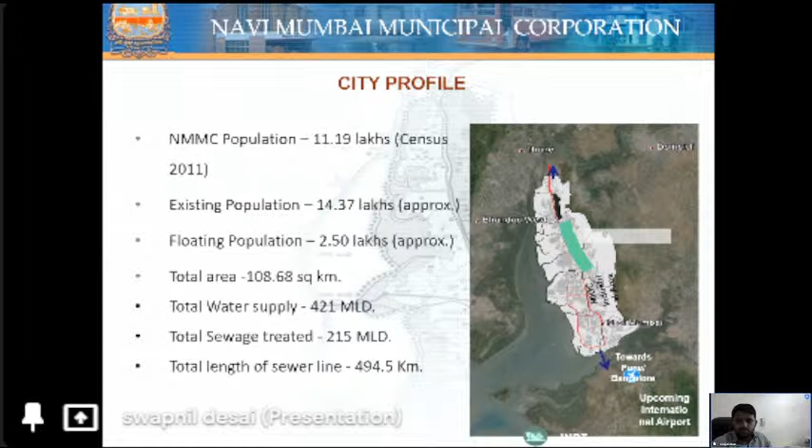So before the initiative, NMMC had 7 conventional sewage treatment plants, generally based on a lagoon system. Most of the treatment units were in deteriorated condition, resulting in partial treatment of the sewage. And because of variation in the flow, like in summer and monsoon season, the existing sewage treatment plants could not cope with the variation in the flow.

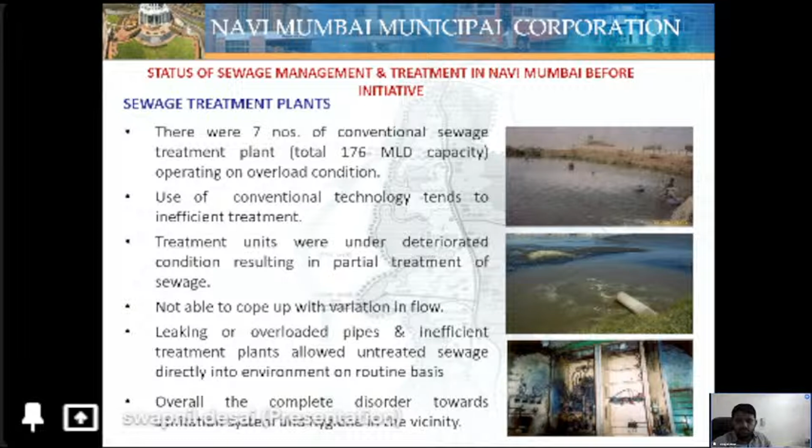So, this led to leaking or overloading of the pipes, or inefficient treatment plants allowed untreated sewage directly into the environment on a routine basis. So, overall, there was complete disorder in the sanitary system and hygiene in the vicinity. So, considering that, NMMC adopted a strategy for sewage treatment, which evaluated the existing sewage network, that is the collection and conveyance system, and the treatment facility within the city.

Also, we identified the sewage treatment facilities and sewers required to handle the raw sewage generated within the city. We were also aware of the different sewage treatment technologies available in the market today, like sequential batch reactor technology, MBBR, and MBR. There are also ultrafiltration, reverse osmosis, and nanofiltration technologies available. So we expanded and enhanced the existing sewage collection, conveyance and treatment facilities, which will cater to the growing population of Navi Mumbai.

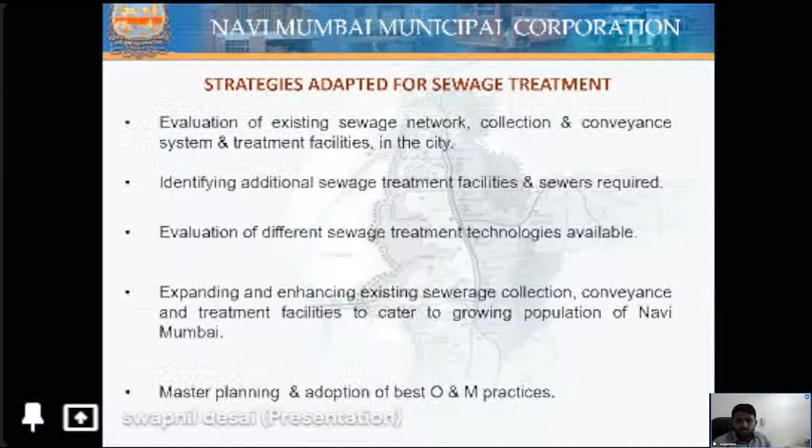We have done the master plan and adoption of the best practices for the operation and maintenance also. Also, our treatment facility is based on conventional technology, which is basically an aerated lagoon system and oxidation ditch system, which do not generate treated water as per the norms laid down by the State Pollution Control Board.

So NMMC has decided to go for some advanced treatment technologies in the field of wastewater treatment. These advanced treatment technologies are basically the modification of traditional treatment by making changes in the process, or by introducing automation. So this technology is named the C-Tech technology, that is sequential batch reactor technology.

This C-Tech based advanced sequential batch technology is nothing but an activated sludge treatment plant where the sewage is treated in batches instead of a continuous process. Its operation is mostly controlled by programmable logic controller panels, and the footprint area of the STP is less than that of the conventional technology.

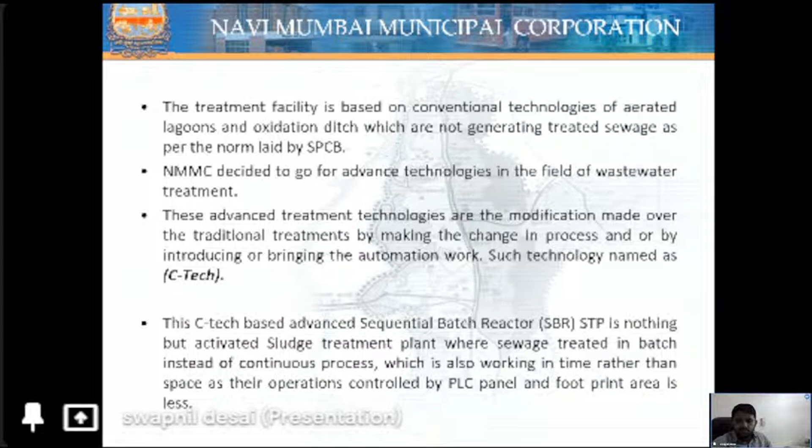So our aim is to adopt modern technology in the area of sewage management, recycle and reuse of wastewater to every possible extent, like for garden purposes, washing of cars, and other non-potable purposes. We provide a 100% sewage network and sewage treatment facility within the city and make it a sustainable sewage system.

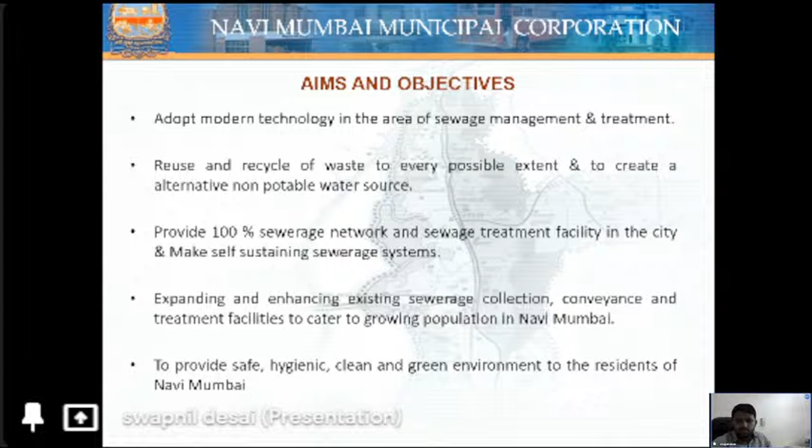We expand and enhance the existing sewage collection system, conveyance and treatment facility that will cater to the population of Navi Mumbai. Also, we provide a safe, hygienic, clean and green environment to the residents of Navi Mumbai. So these are the basic infrastructure of sewage management within the city.

NMMC has 6 sewage treatment plants: 100 MLD capacity at Nerul and Vashi, 80 MLD capacity at Airoli, 87.5 MLD capacity at Kopar Khairane, 37.5 MLD capacity at Sanpada, and 19 MLD capacity at Belapur. Also, there is a 30 MLD sewage treatment plant constructed by CIDCO and handed over to NMMC in 2017. So we have a total of 7 sewage treatment plants with a total capacity of 450 MLD.

We also have 21 sewage pumping stations that receive the raw sewage generated within the city and transfer it to these 7 existing sewage treatment plants. The total sewage pumping capacity is around 212 million liters per day, and the total length of the sewer line is around 494 kilometers. At present, around 215 MLD of raw sewage is treated at our 7 sewage treatment plants. So these are the details of the sewage pumping stations.

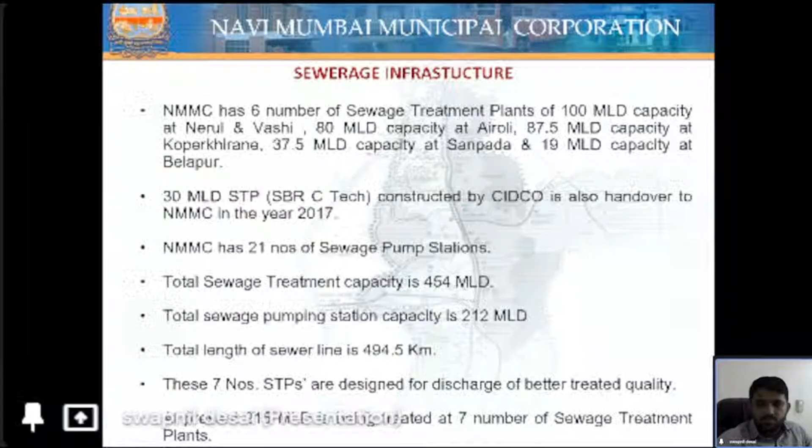Basically, our old plants were based on conventional technology with around 176 MLD capacity, and we upgraded these plants based on modern technology, known as SBR, sequential batch reactor technology. So we upgraded the treatment capacity from 176 MLD to 454 MLD. Also, the area requirement for these modern technology-based STPs is around 50% less than that of the conventional technology.

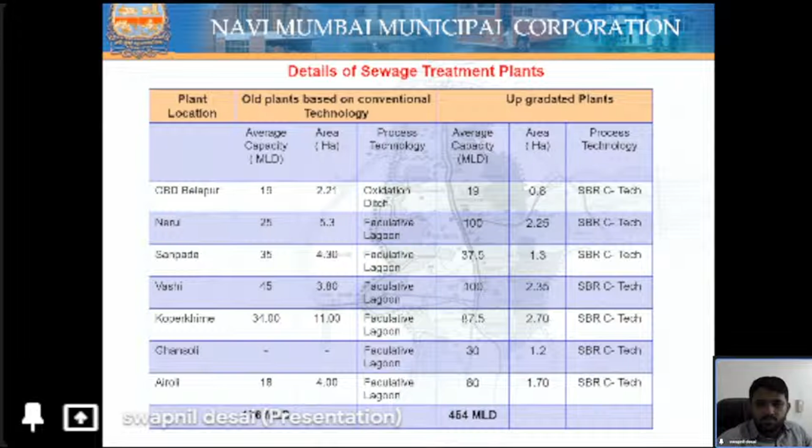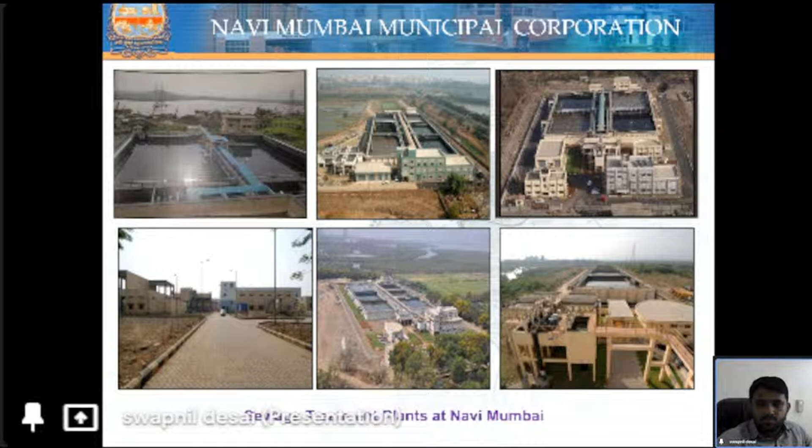So these are our sewage treatment plants, located at different locations in Navi Mumbai: one at Belapur, one at Nerul, one at Kopar Khairane, one at Airoli, one at Sanpada, and one at Vashi. This is a typical process diagram for the sequential batch reactor technology.

Firstly, raw sewage from the pumping stations is collected at the sewage treatment plant, where there is a raw collection tank known as the pump house. The function of this pump house is to lift the raw sewage to the primary treatment. In the primary treatment, we have installed different types of screens: a mechanical bar screen that removes floating particles up to 20 mm, and a fine screen that removes floating particles up to 6 mm.

Then this raw sewage is transferred to the grit chamber, where grit particles like sand are removed. Then the primary treated sewage is transferred to the sequential batch reactor basins. For each plant we have around 4 to 6 basins where different processes are carried out. We will see the different processes one by one.

After the sequential batch reactor basin, the semi-treated sewage goes to the chlorination system, where we have a chlorine system to disinfect various bacteria and viruses. And finally, the treated water is collected at the collection tank.

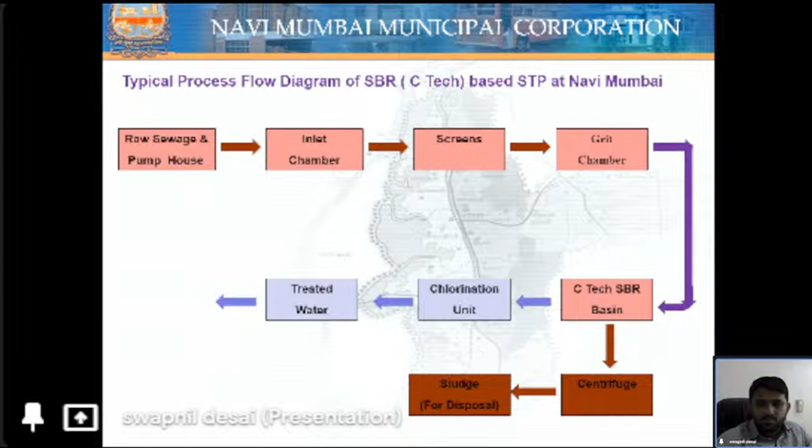Also, in a sequential batch reactor basin, there is sludge generated within that basin. We can lift this from the basin with the help of different pumps, that is the return activated sludge pump and surplus activated sludge pump, and transfer it to the centrifuge machines. This centrifuge machine basically removes the water content of that sludge, and this sludge acts as a manure for gardening purposes. We use this sludge for our horticulture purpose.

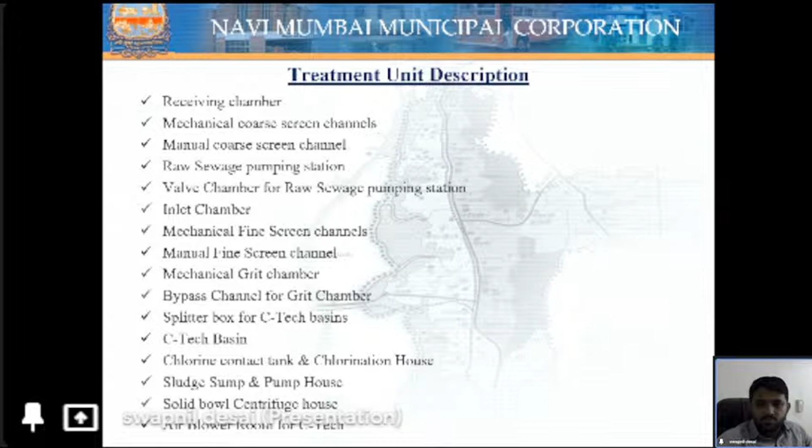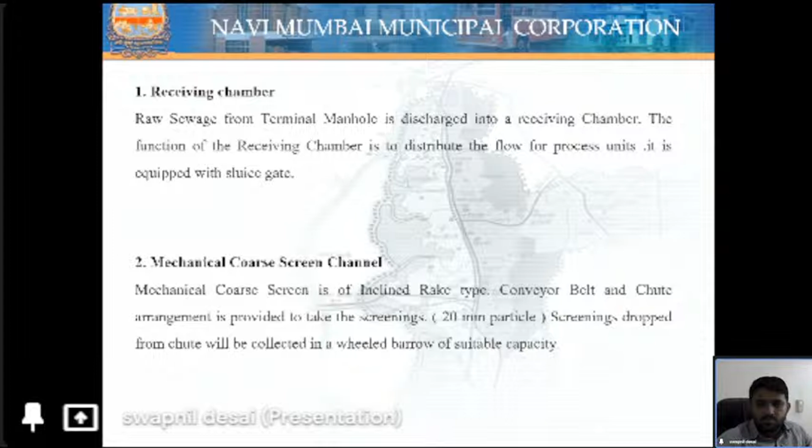So we can see one by one the different units in sewage treatment plants. First is the receiving chamber, as we discussed. Raw sewage from different terminal manholes is discharged into this receiving chamber. The basic function of this receiving chamber is to distribute the flow for the process unit. Again, there is a mechanical coarse screen that can remove the floating material up to 20 mm particles. Again, there is a manual screen.

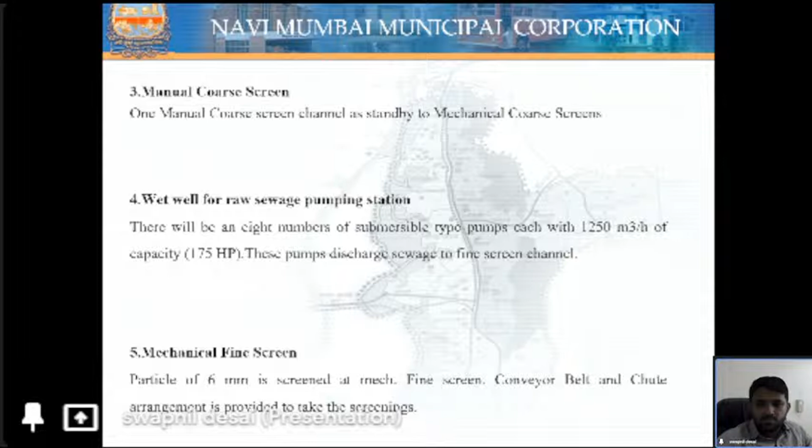Then after screening, raw sewage goes into the wet well for the pumping station. We have 8 pumps having a capacity of 175 HP. These pumps discharge the sewage to the fine screen for removing the 6 mm particles. This is basically a mechanical fine screen which is used to remove particles up to 6 mm.

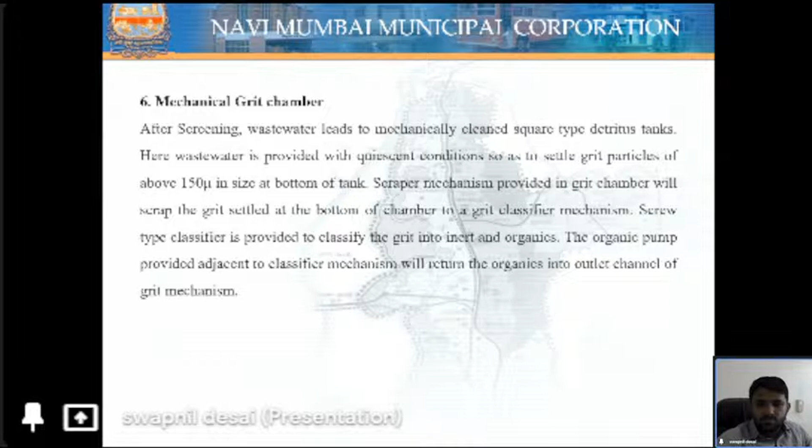Then the mechanical grit chamber. After screening, this wastewater is mechanically cleaned. This is basically a detritus tank where the wastewater is provided with quiescent conditions so as to settle the grit particles above 150 micrometers. And this scraper mechanism is used to remove the grit, and it generally contains inerts and organics. We also have organic pumps, which are provided adjacent to the classifier. This is basically the grit chamber mechanism.

So again, as we discussed, primary treatment includes screening of 20 mm particles, then 6 mm particles, and also removing the grit. This is basically primary treatment. With any kind of technology you adopt, there is a primary treatment that can remove the floating materials and the grit particles.

Then there are basins with a biological process where we have four cycles within that basin: first is filling, second is aeration, third is settling, and the last one is decanting. So it has a 3-hour cycle. We can see what happens in that basin.

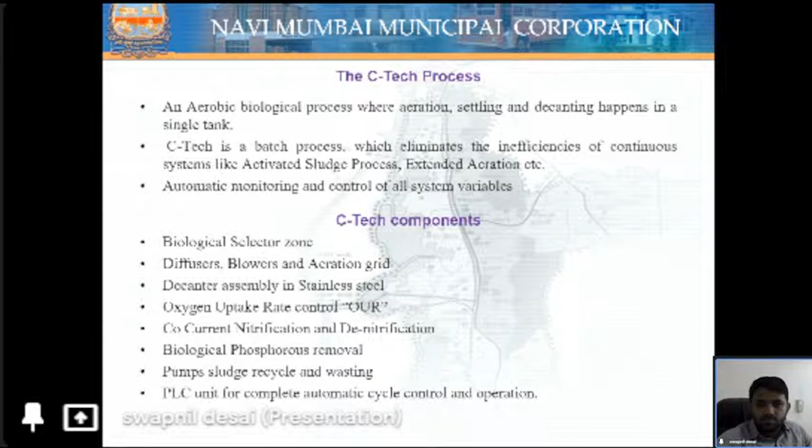So the C-Tech component has a biological selector zone and diffusers which provide the oxygen for bacteria within that reactor. To provide the oxygen, we have an air compressor within the system. Also, the decanter assembly in stainless steel handles the treated water, and it is transferred from the C-Tech basin to the chlorination system for disinfection of bacteria and viruses. So this is typically what the actual SBR C-Tech is.

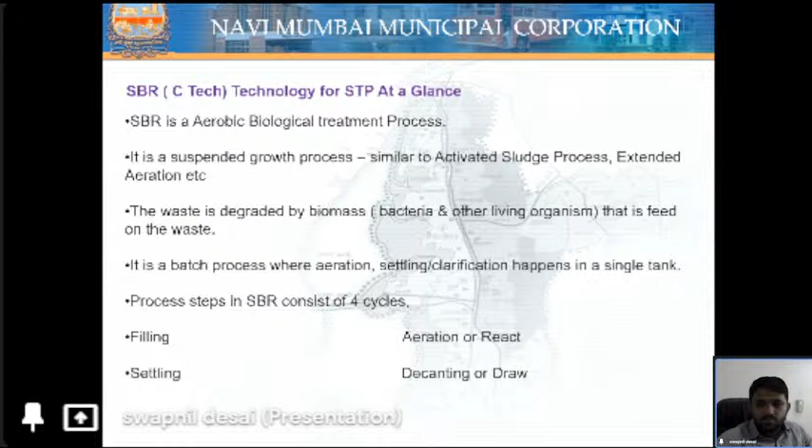So SBR is an aerobic biological process. It is a suspended growth process similar to that of the activated sludge process. The waste is degraded by biomass, that is bacteria and other living organisms. It is a batch process, where aeration, settling, and clarification happen in a single tank. Typically, SBR consists of 4 cycles, as we discussed. First is filling, second is aeration, third is settling, and the last one is decanting. So these are typically the 4 cycles within that basin.

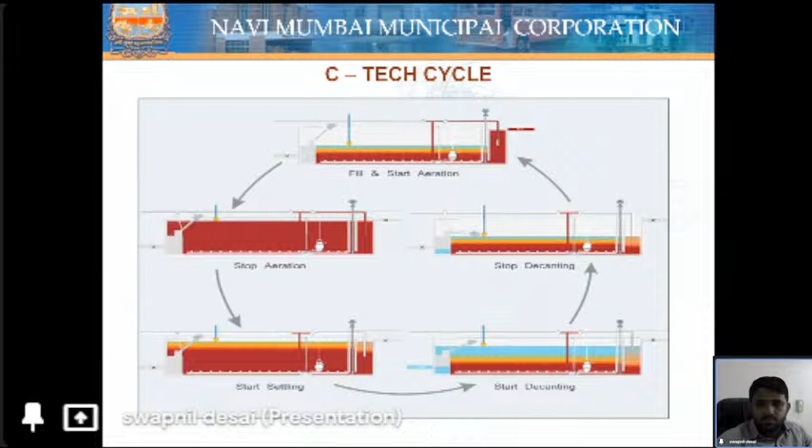Firstly, for 30 minutes, raw sewage enters the basin. Then 60 minutes is for aeration. Then again 30 minutes is for settling, and again 60 minutes is for decanting. So fill and aeration, as we see in the picture. The picture is the aeration mode, where we have a number of diffuser systems installed within that aeration basin. The basic function of this aeration is to grow the bacteria within the basin that can decompose the organic matter.

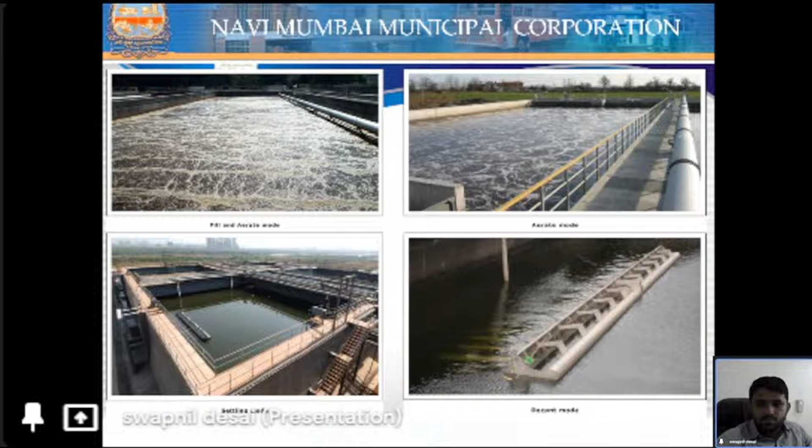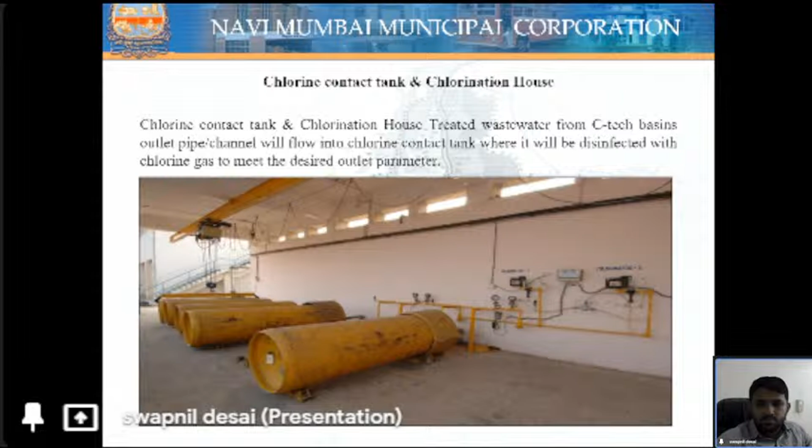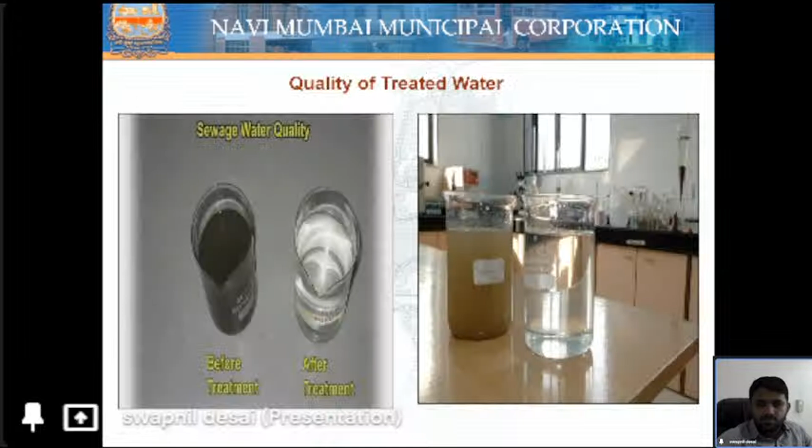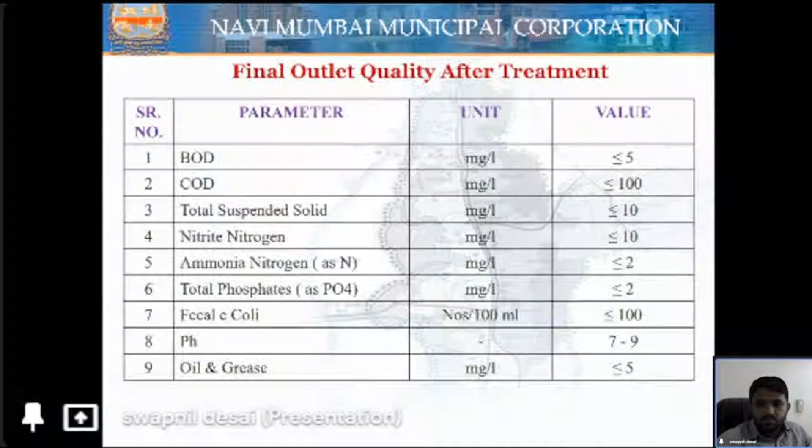So this is our treated quality before treatment and after treatment. These are the quality parameters, as we have an in-house laboratory to test different parameters like biological oxygen demand, chemical oxygen demand, ammonia nitrogen, total phosphorus, fecal coliform, pH, and oil and grease. So these are our outlet parameters. We have BOD less than 5, COD less than 100, total suspended solids less than 10, nitrite nitrogen also less than 10. So this is the performance and sustainability of treated water for around the last 14 years. As per the Central Pollution Control Board, the BOD limit is around 10, but we have achieved BOD less than 5.

Also, the COD limit is less than 50, and we achieve the COD around 20 to 30. Total fecal coliform also we have 12 to 13 MPN count, and the pH value is within 6 to 9.

So for the outcome, the cost of our potable water treatment and conveyance up to the city is around 2.1 rupees per meter cube. Operation and maintenance cost of the STP is around 1.6 rupees per meter cube.

We have a part of the treated water which is supplied to commercial, institutional, and industrial consumers for non-potable purposes. The STP is designed to cater to the need of sewage treatment till 2031. Also, the structure and materials of construction are selected for longer life, and the STP is also designed to treat the sewage to the highest level.

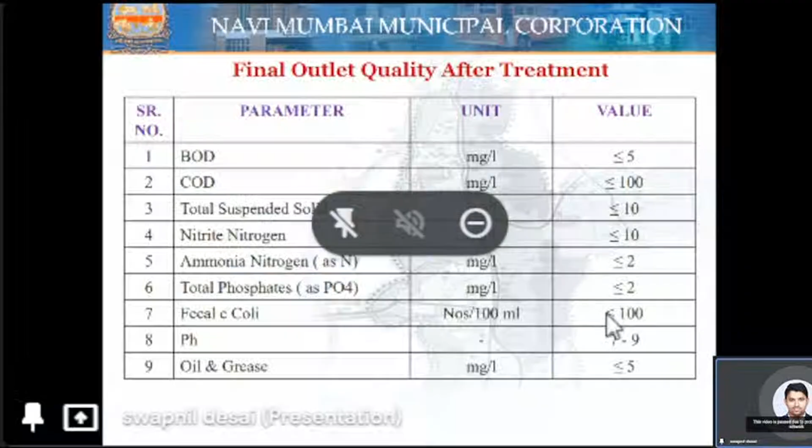Thus the pollution load on the nearby creek is reduced. So we have consistency in the quality parameters of treated sewage for the last 12 years.

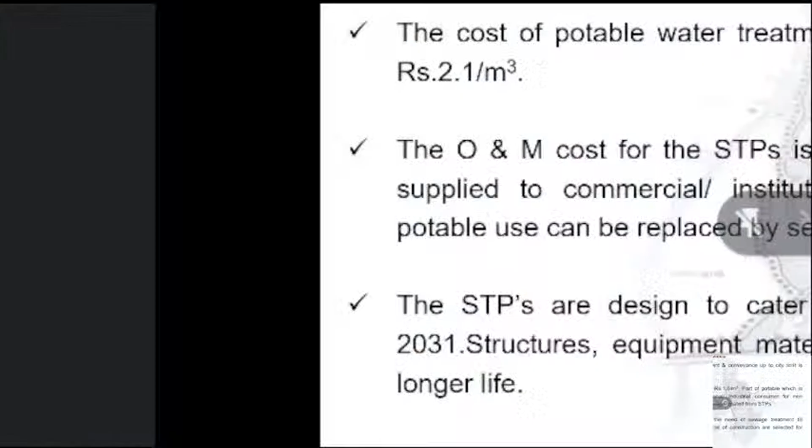Also, the capacity of the STP is designed in such a way that it can handle situations of rainwater flooding.

Also, we save 50% less land as compared to our conventional treatment plant. Around 215 MLD of treated sewage water demand is to be generated for the industry, so it has large potential for revenue.

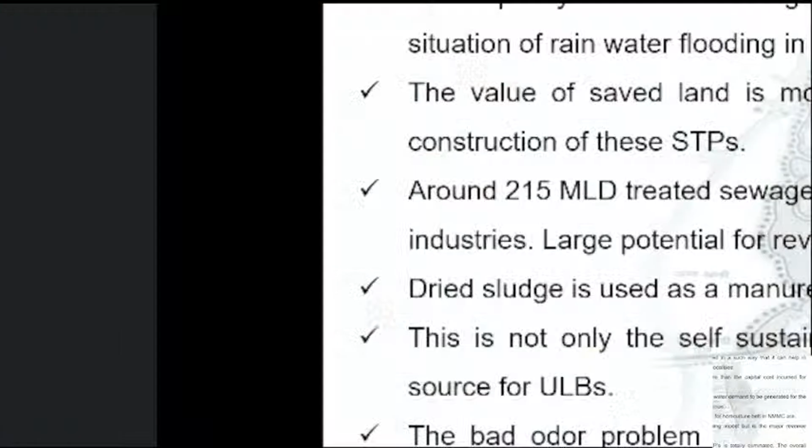Dried sludge is also used as manure for our horticulture belt in the NMMC area. The bad odor problem, like in conventional treatment plants, is eliminated with the help of these modern STPs, so the overall environmental condition has improved.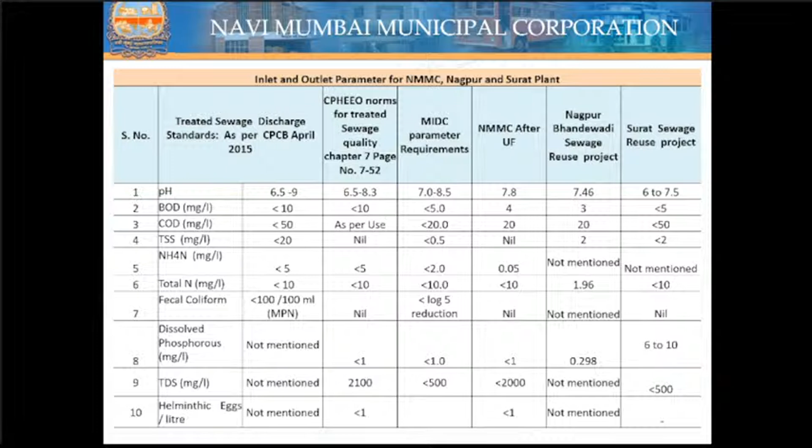So in order to carry out the recycling and reuse of this treated water, we had a number of meetings and discussions with IIT, MSBTE experts from the area, chief engineer from CIDCO, and other experts from Maharashtra Jeevan Pradhikaran and consultants of NMMC.

So as the outcome of the discussion and site visit, to meet the outlet parameters prescribed by the CPHEEO manual and the requirements of MIDC, the ultrafiltration process was finalized.

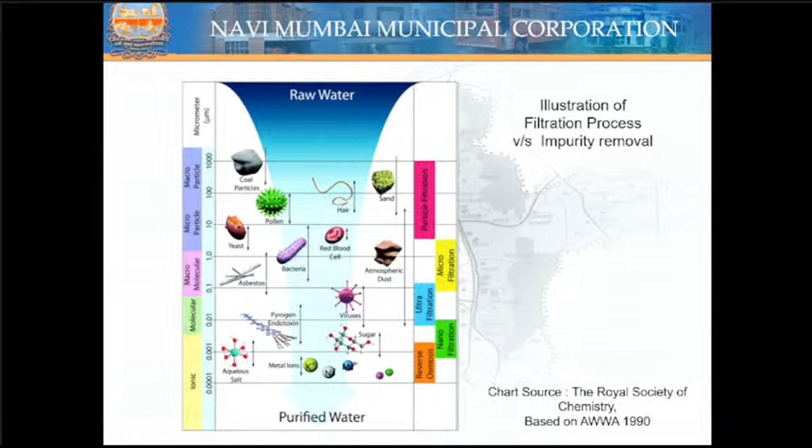So this is the tertiary treatment of treated sewage where ultrafiltration modules are there, which can handle bacteria and viruses, and also the total suspended solids, that can generate water for industrial purposes.

So we have installed tertiary treatment plants, one at Kopar Khairane and one at Airoli STP. Our Kopar Khairane plant is commissioning, and we have made an agreement between NMMC and MIDC to sell the treated water for around 18.50 rupees per meter cube.

In that process, typically we have a secondary treatment plant. The final outlet of this secondary treatment plant is then transferred to the tertiary treatment plant, where firstly there is a sand filter, and again after the sand filter there is a disc filter that can remove suspended solids to less than 3.

Again, this treated water is then transferred to the ultrafiltration module, where all bacteria and viruses are removed, and then after that we have installed a UV system to disinfect the pathogenic bacteria.

So this is the network for treated water that can be sold to the Maharashtra Industrial Development Corporation.

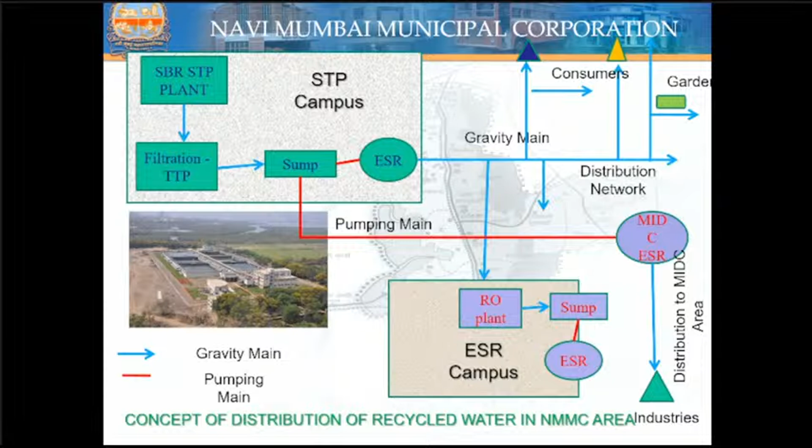The operation and maintenance cost of the secondary treatment is around 3.82 rupees per meter cube, and the O&M cost for the tertiary is 2.45 per meter cube. So the production cost of this treated water is around 16.23 rupees per meter cube, and our water sale rate is around 18.50 rupees per meter cube.

So total expenditure for the NMMC for the next 15 years is around 307.69 crore, and our projection for revenue for the next 15 years is around 494 crore.

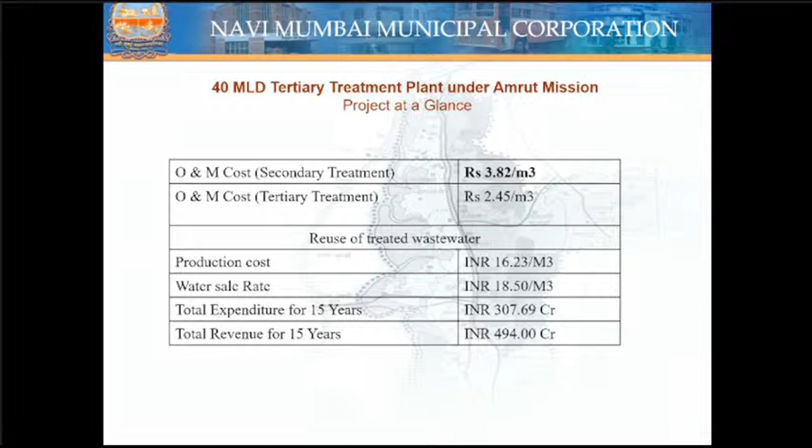So we have a 40 MLD tertiary project under Amrut mission. It has a dual media filter with UF and UV system. This tertiary project supplies the treated wastewater to desired quality within the state-of-art facility from the two sewage treatment plants to various industrial estates for non-domestic purposes.

Also, we have a 5 MLD tertiary treatment project with fiber disc filter and UV disinfection system. That treated water is used for the green belt developed between the roads and 31 gardens in the city, which reduces the infrastructure burden for drinking water.

So almost 30% of treated water, that is around... we treat 250 MLD raw sewage, and out of that around 65 MLD treated water is reused for different purposes within the city, like gardens, washing of solid waste vehicles, compactors, city transport buses, sprinklers, and road dividers. That will reduce the burden on fresh water.

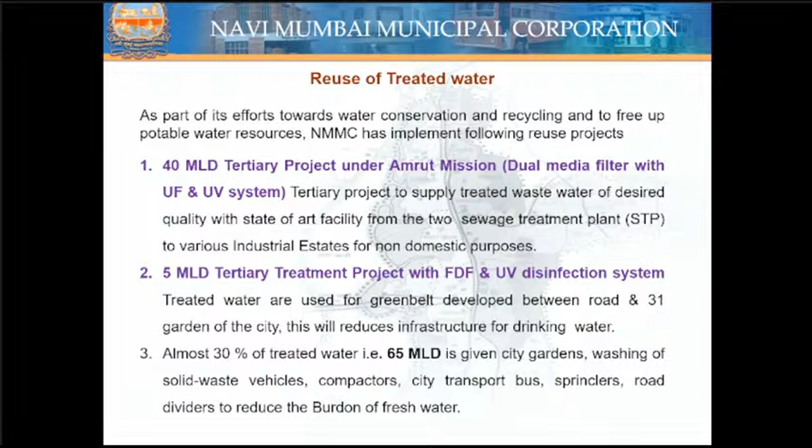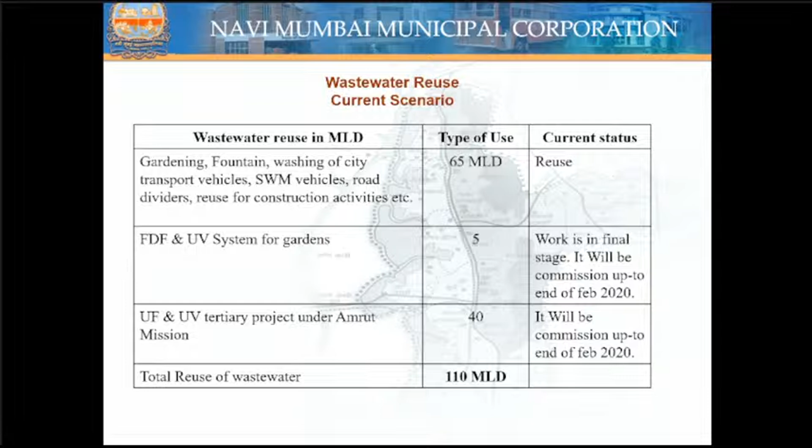So 65 MLD is used for gardens, fountains, and washing within the city. Our one plant, around 5 MLD capacity, is used for this. This treated water is used for different gardens within the city, and we have a plan for a 40 MLD capacity tertiary treatment plant with UF and UV, which will be commissioned in February 2020. So total reuse of wastewater is around 110 MLD.

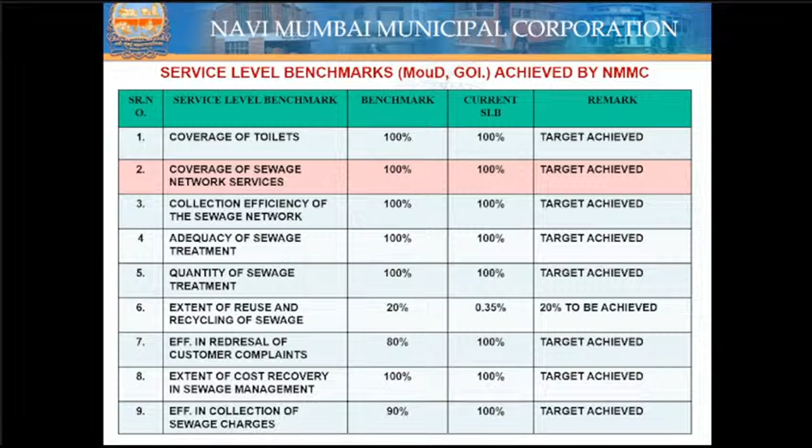MOUD, Government of India, laid down a target to reuse treated water up to 20%, but in NMMC area our current SLB for recycle and reuse is around 0.35%. Efficiency in redressal of customer complaints is around 100%. Cost recovery is around 100%. Sewerage charge collection is around 100%. So all the targets laid down by MOUD, Government of India, have been achieved by NMMC.